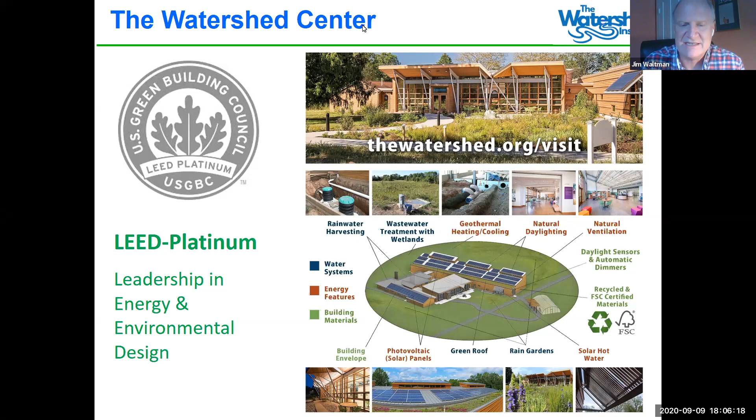It's also a great teaching platform for us as we work with municipalities and the private sector to improve stormwater management. We have a number of programs throughout the course of the year. I just want to queue up a couple that are a little bit in the future, but on February 4th and 5th, we'll be conducting our second annual Green Infrastructure Training and Certification program. This is designed for landscape professionals and public works staff, and it's a collaboration with a great group called the Chesapeake Bay Landscape Professionals. This is a program that just recently reached out to us in interest of expanding beyond their scope, which obviously has been the Chesapeake Bay.

And then later that month in February, we'll be providing a green infrastructure maintenance training program specifically for public works staff, and we'd love to have your town staff join us for that. Of course, our staff would welcome other opportunities to come and present to your municipalities if you believe that would be of help.

We're located near Pennington, Hopewell Township and Mercer County, and we tend to focus in that part of the state. ANJEC is a great partner that does work across the state of New Jersey, and I'm sure they would welcome opportunities to come speak to your municipal bodies as well.

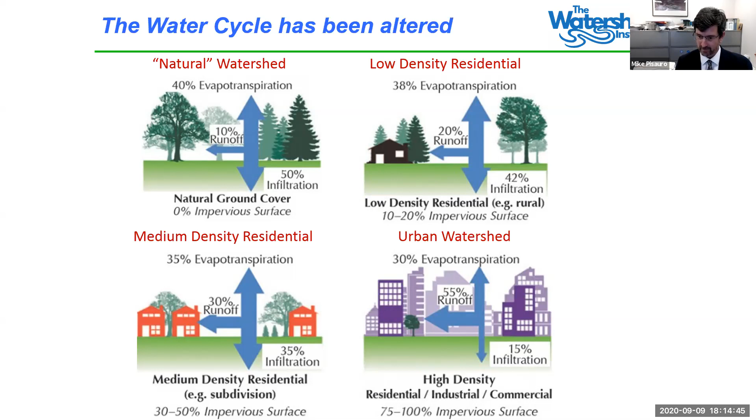Today, DEP just released with Rutgers a fairly regular land use change update, which indicated a little over 30% of New Jersey has urbanized, has urban cover, meaning that lower left-hand side scenario. So with 30% impervious surface, which varies depending on where you are in New Jersey, as a whole, 30% of water that hits the ground from rain events runs off versus 10% naturally. And that has real world implications.

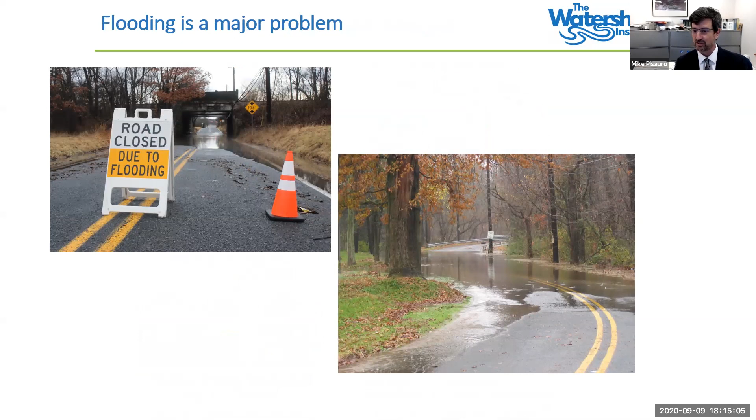And here are some of those real world implications. These are two roads that I take sometimes to work. As Jen mentioned, we've all experienced flooding and impacts on our way to work. Here's two of them that I've personally had issues with, and here's a few others. These aren't the Irenes, the Katrinas, and the Sandys—these are just everyday rain events, not extreme weather events.

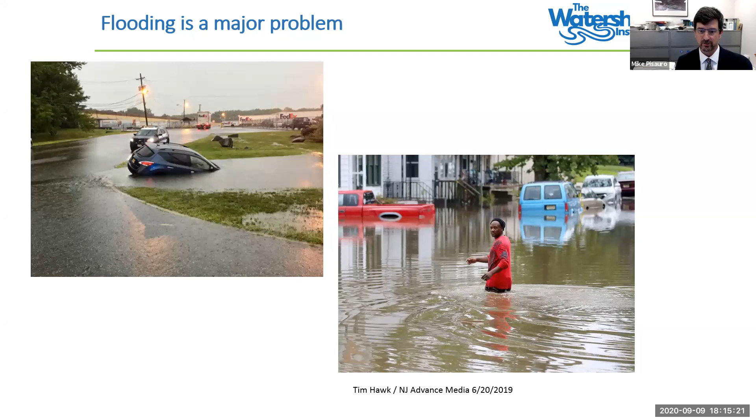What many of us grew up with from a rainfall event is changing, and that has changed over years. This slide's a couple years old, but in the first 70 years of the 20th century, New Jersey experienced a little over 44 inches of rain.

The first 14 or 15 years of the 21st century, that's raised to almost 48 inches, which gives you almost 3.5 inches more rain than we used to have and that we are used to dealing with. That means we're dealing with a lot more rain that has to be addressed, as the state continues to urbanize and has impervious cover. That water has to go somewhere.

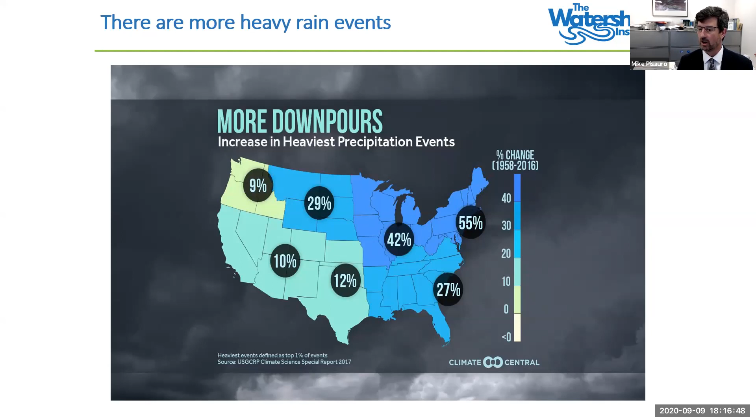At the same time as we're having more rain, the patterns of that rainfall have changed. In the Northeast, we're having more heavy precipitation events versus a long-term gentle rain that I remember fondly as a child, but more of it's coming down in a more intense period of time, which means our land cover and our systems have less opportunity to address it.

Not only are we having to deal with more rain, more volume, but that has real-world implications for water quality. Every two years, the state of New Jersey comes out with a water quality report, required by federal law. This is the most recent one, from 2016.

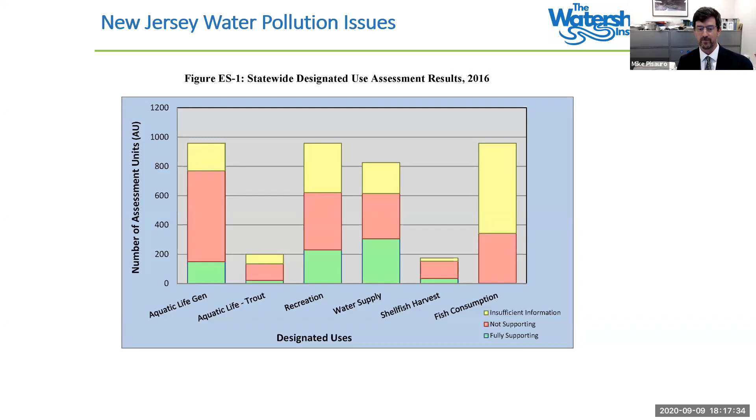Red is not good, and that red means we have water that's not meeting standards, that's not healthy enough for aquatic life, not healthy enough for recreation, not healthy enough for water supply. This is 2016, and in case people think I've cherry-picked a report...

2010, six years ago, a little different format, but generally the same result. If I went back to 2006 or 2004, we would generally have the same thing. Our modern stormwater rules came out in 2004, and we've been implementing them since.

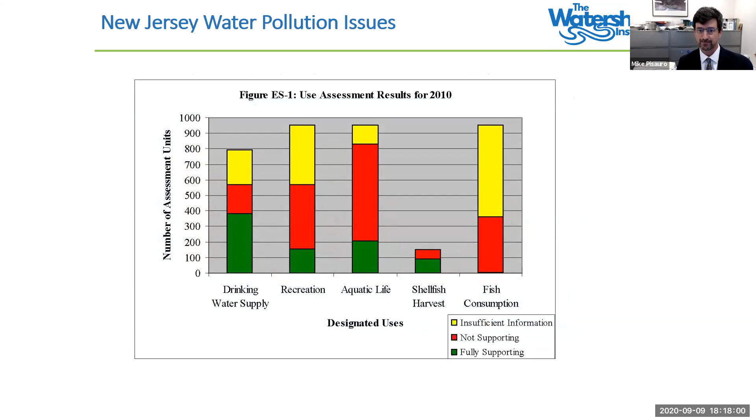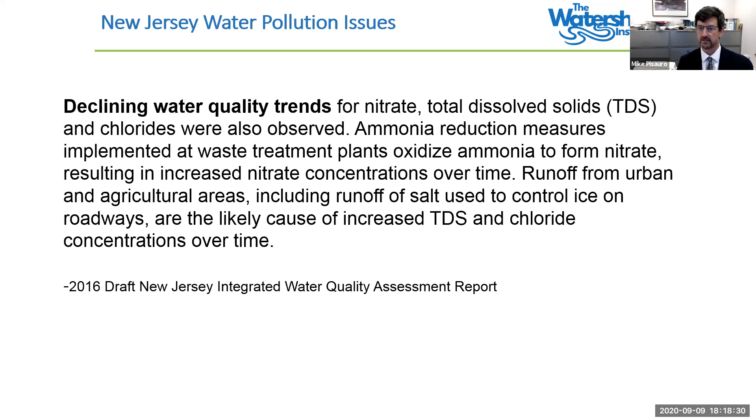DEP has indicated in the 2016 report and the 2014 report that we're seeing declining water quality trends, and that has been, for the most part, because of urban runoff, because of how we, as a developed state, are addressing our stormwater management. According to the 2016 report, declining water quality trends include total dissolved solids and chlorides, and again from that same report, there's a correlation between our land development and our water quality.

So all of that sediment has gone somewhere. All of that sediment has impacted aquatic life. All that sediment has impacted water quality. So there are some real implications.

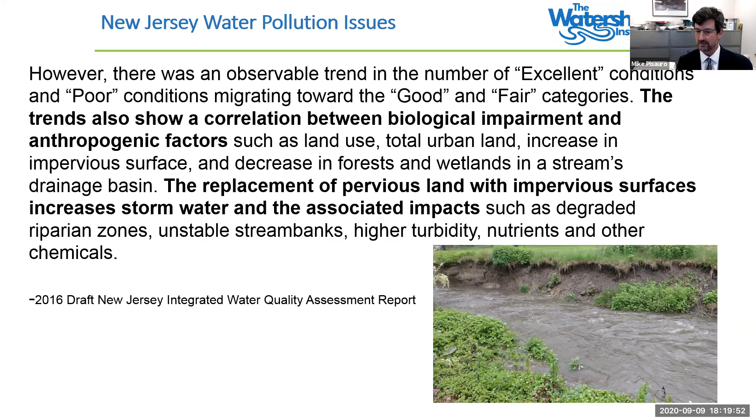As mentioned, our modern stormwater rules came out in 2004, and we updated them just this past March with the Green Infrastructure Rule. But we're trending towards a report card of a C. As I tell my kids, if that's the best you can do, that's great, but I know my kids can do better, and I think the state of New Jersey can do better, because the goal for water quality is not to become average, but to restore and enhance water quality so it returns to a natural condition. That's the goal we've had in New Jersey since the Water Pollution Control Act and the Federal Clean Water Act.

So that was a very quick run through of real-world water quality implications. As Jen mentioned, we're all experiencing flooding. We can all point to roads and areas of our town that flood, that maybe didn't flood as a kid or only flooded during an extreme event, but now it's becoming more and more prevalent.

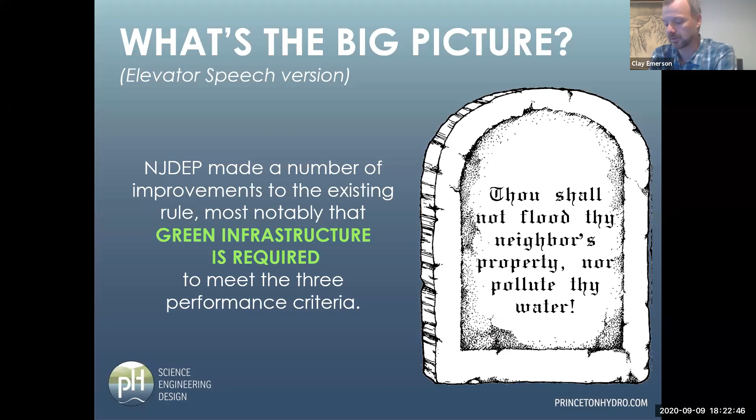And a lot of that hasn't changed. But the DEP has made a number of improvements to the existing rule, most notably that green infrastructure is required to meet the three primary performance metrics, if you will. I have to give them kudos for taking this on and going through a rather lengthy stakeholder process, getting input from the public - probably many of you participated in a lot of that. I think they really did an excellent job getting us to where we are now.

So very brief review of what I'm going to go over: some introduction stuff, and then dive into some of the details that maybe you aren't as familiar with.

So again, starting with a little bit of the bigger picture, what is green infrastructure? In our line of work, we look at it as more than just stormwater BMPs. We're thinking about wetland creation, reconnecting floodplains, living shorelines - it's a new approach to design with a focus on natural processes. Nature is an amazing thing, and things have evolved to work a certain way, and if we can take advantage of those processes to our benefit, that's what we're looking to do. That's more my general definition of green infrastructure.

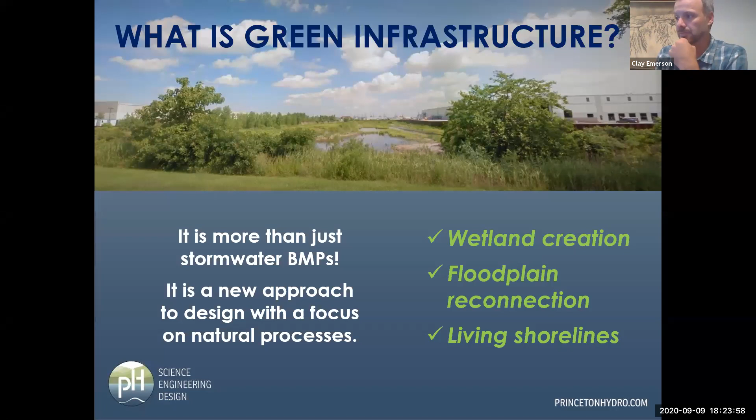But in our slice of that blue marble pictured from the moon, here in the state of New Jersey, one of the critical environmental problems we face is stormwater runoff, because we're at a point where we have a lot of infrastructure - Mike will talk about later - a built-up environment, and sensitive receiving waters that we all rely on for one thing or another.

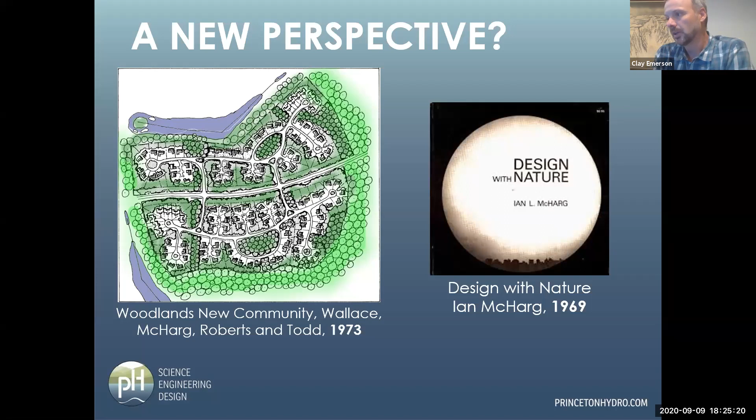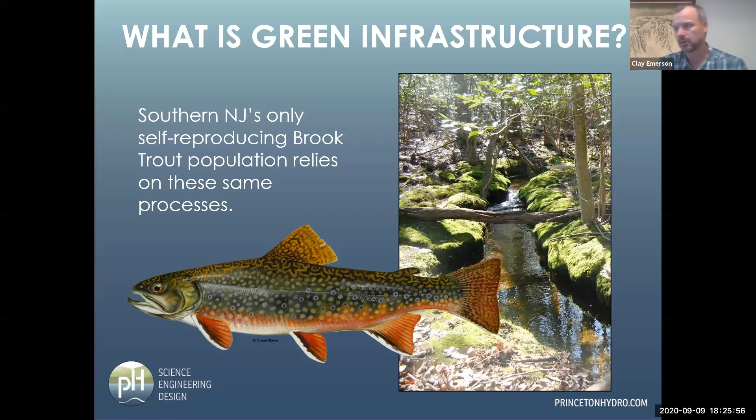Speaking of things relying on our hydrologic cycle, here's a picture of the state fish, I believe, brook trout. Believe it or not, there's a self-reproducing population of these fish in southern New Jersey where you wouldn't expect it - it is not stocked. It's a very weird watershed, and it has a lot of the processes we're going to talk about here today that, believe it or not, come back to this green infrastructure amended rule to thank for maintaining this really unique water quality in this very small tributary.

So we'll connect those dots. But for now, we're going to focus on that somewhat narrow definition of green infrastructure as it relates to managing runoff from impervious cover. This is a schematic clip from 50 years ago from some of that work I referenced. So what is old is new, but here it is, and the clock is ticking on these amended stormwater rules.

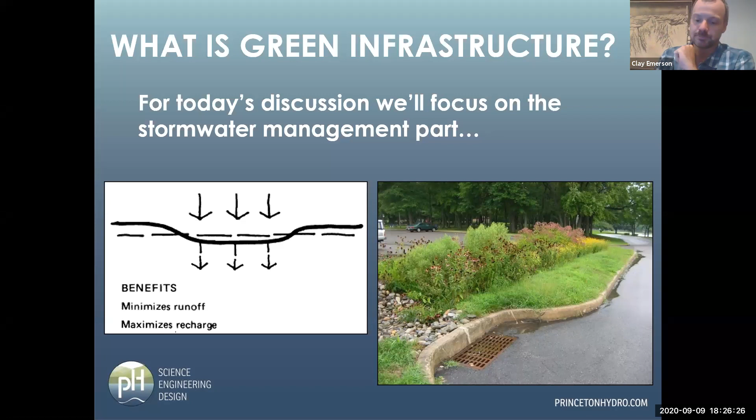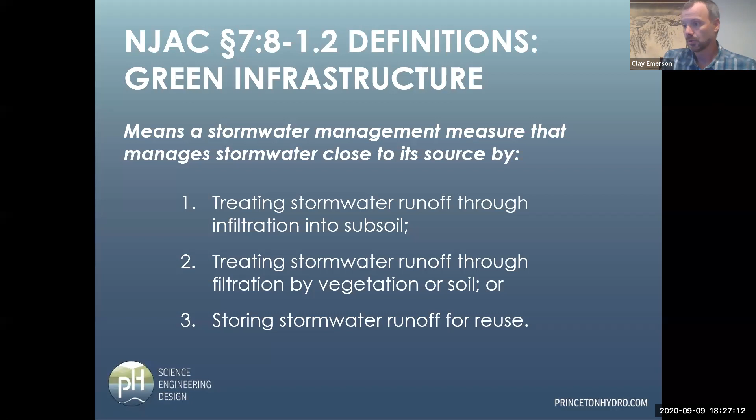So you can have whatever definitions you want, but what matters here is that the state has their own definition, referenced directly from the amendment, the new rules. The definition of green infrastructure means a stormwater management measure that manages stormwater close to its source - we'll come back to that part of the definition - by one or more of the following three things: treating stormwater runoff through infiltration into subsoil, or treating it through filtration by vegetation or soil, or storing stormwater runoff for later reuse.

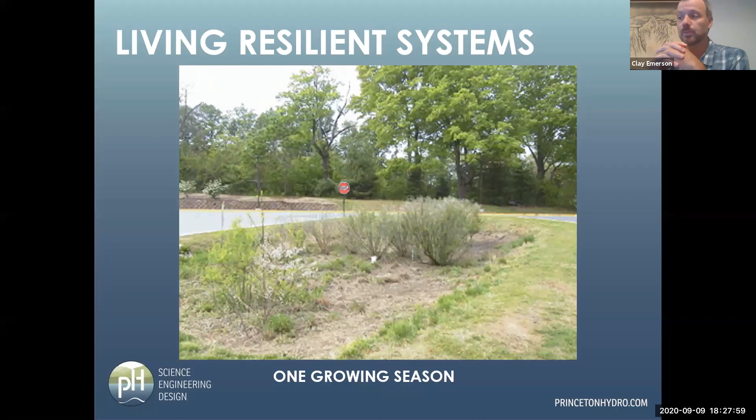And what we have here is just one growing season. I put this in here because these systems, many of them can really be living, resilient systems. So if you see this kind of productivity going on above the ground surface in this shallow traffic island that was constructed, you can imagine all the things going on in the soil beneath this that help keep this system working, and working without a lot, or in this case any maintenance besides mowing once in the late winter.

So we can talk about definitions, but I like pictures. Here's a couple pictures - what is green infrastructure? Both of these pictures are relatively recent projects. The top is a basin retrofit we completed in a residential neighborhood where the adjacent property owners wanted kind of a multifunctional system. They wanted the flora and fauna. They had a typical nasty detention basin, and this was the finished product they got. The photo at the bottom would also meet that definition of green infrastructure, but what you're looking at is a subsurface storage system that could be an infiltration system as well to meet that definition, and that's going to have a parking lot on top of it. So we've got to think of the wide range of things that would fit this definition. We'll get more into that.

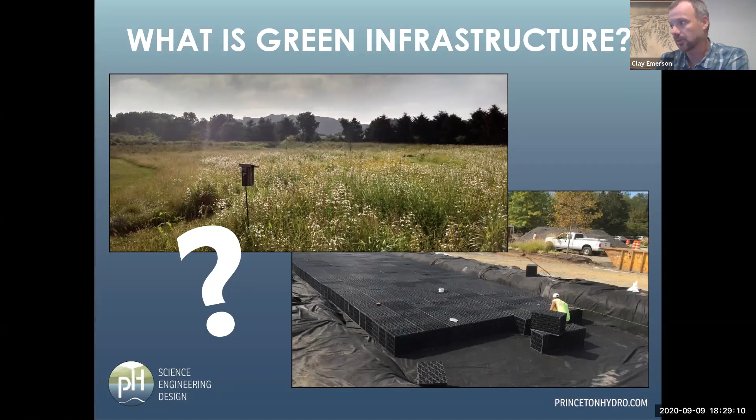Sometimes the best way to define things is to define what they're not. And this is probably an all too familiar site - typical detention basin, concrete low flow channel, they've got the left turn only retaining wall thing there at the outfall, and you can see here you've got the mandatory 1 inch of ponded water to provide habitat for the mosquitoes. There's nothing here that really screams water quality. So these things might be forced into extinction, at least as it applies to future development going forward.

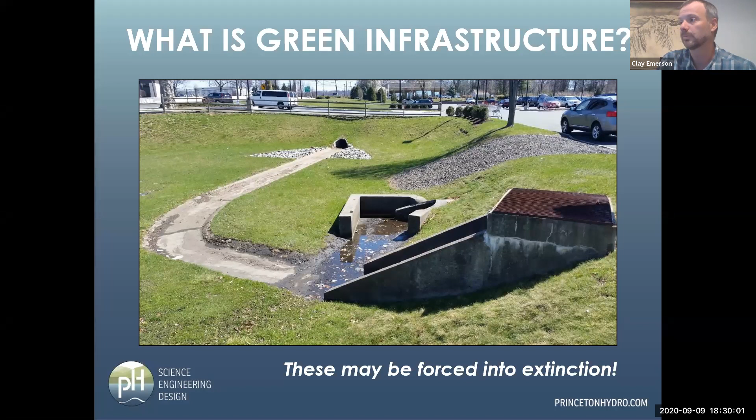So again, the three primary performance metrics are generally unchanged. As a quick refresher, we're talking about groundwater recharge, water quality, and peak flow control, or water quantity as it's referred to in New Jersey.

Those performance metrics, as I said, are unchanged. There's discussion about those - maybe that's something that will change in the future, but for now there are no changes there. That may seem surprising. But the big change here is that how these are met in practice, in other words what needs to be done to demonstrate compliance, is different in, I would say, many cases, not necessarily all.

So this is the Cliffs Notes version here that you'll be getting. There's more information - I'll give you some links where you can find more. Many of you, it sounds like if you've sought this out, you're on the ball and you're looking at things, and maybe some of this will be a review.

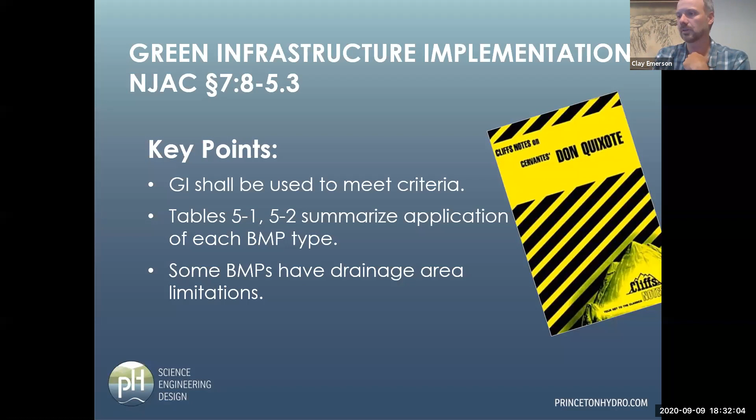But the key point here is that green infrastructure, I've abbreviated GI here, shall be used to meet the criteria. They published tables, specifically tables 5-1 and 5-2 primarily, which summarize how each BMP type can be applied. Some of these BMPs will now have drainage area limitations, which is a brand new thing. Another point is that the amended rules - the arrangement and ordering of the chapters has been totally shuffled, and that's a good thing. The new order the state placed them in is, I think, much clearer, easier, and more logical. So that's another improvement they made. But if you're used to your sections, they're going to mix them up on you, so keep an eye out for that as you go through.

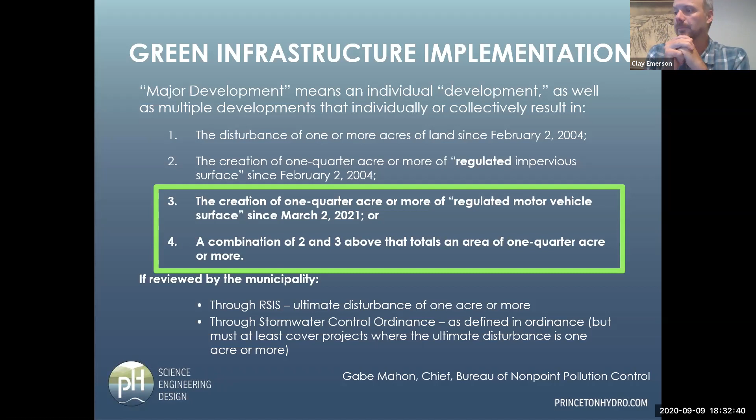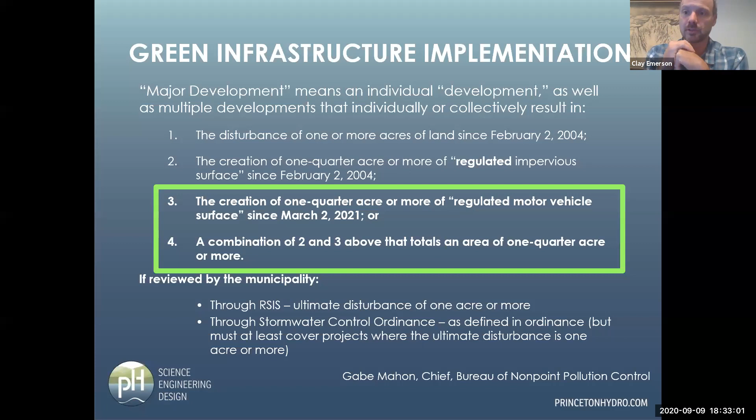In addition to the BMPs themselves, there are some other changes that require discussion here, and that is the definition of major development itself. Some of this is fairly new - they've added dates, changed the dates since February 2nd, 2004. But items 3 and 4 here are new: the creation of 1/4 acre or more of regulated motor vehicle surface, and then they have to put in a combination of 2 and 3 above. In other words, the take home here is that the term major development - that regulated motor vehicle surface, which we haven't defined yet - is kind of treated the same as impervious cover in terms of the definition of a major development. So that is something to keep an eye on.

So these slides are a little busy, but I would be in trouble if I didn't include them. I took this more or less with just some minor formatting from the amended rules, and basically this is table 5-1. You'll probably get more familiar with this - these are the BMPs that can be used for recharge, water quantity, and water quality. You can go across this and pick your favorite one, the ones you'll see the most of - small scale infiltration basins, you get 80% TSS removal. They can be used for water quantity as well. Let's see if I can use this thing.

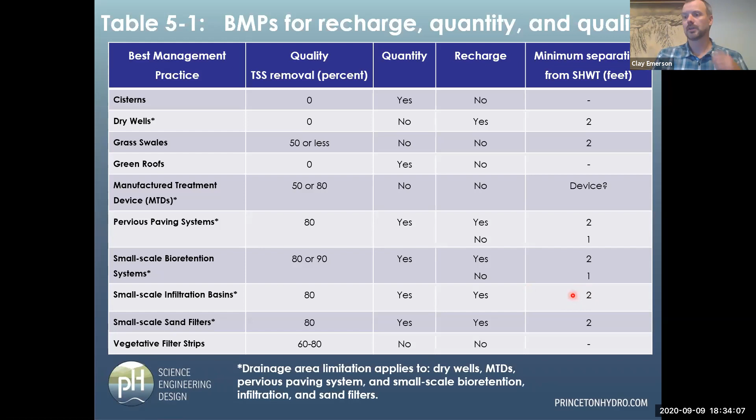And they can obviously be used for recharge, and they have to have a 2-foot minimum separation from seasonal high water table, a topic that I could go on and on about, but I'll try not to. And so a wide variety of different BMPs.

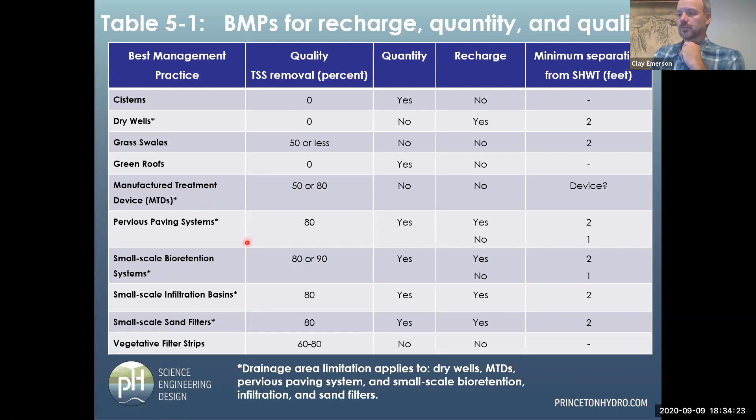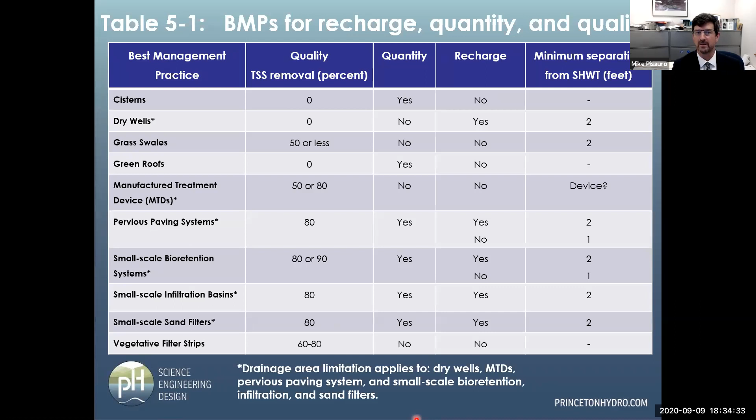These are all, depending in some cases on the type of MTD, considered green infrastructure practices that would be available. Clay, if you could just very quickly explain what a BMP is. Oh, absolutely, I apologize, I can't stand it when people speak in acronyms that I don't know. So yeah, a BMP, when I say BMP, I'm thinking of any stormwater management practice, something an engineer is likely required to design, in this case, to support a land development application.

So things like dry wells, detention basins, although you don't see that on the list here, bioretention systems, these are all BMPs. Another acronym I have listed here, manufactured treatment devices, you'll hear me say MTDs, which are proprietary boxes that are typically placed underground that provide some kind of water quality treatment for stormwater runoff.

And I'll be mindful of my acronyms going forward. Here I've got two other ones. This is one, seasonal high water table, SHWT. Again, that's something that in New Jersey is really a pretty big issue.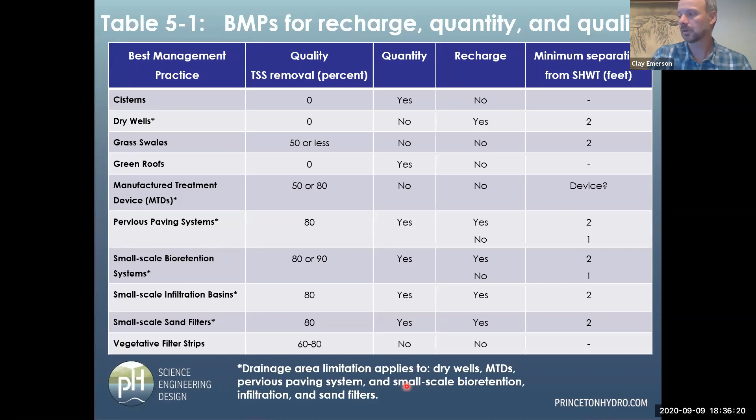If I may, I'm going to go back one slide. Some of these have asterisks, and I'll come back to that, but generally this is where those drainage area limitations come into play. So for systems like dry wells, again the manufactured treatment devices, pervious pavement, and small scale bioretention and infiltration basins and sand filters. I'll come back to that point.

These are the ones, this is table 5-3, which I didn't reference earlier intentionally. And that is because these are the ones that you would technically need a waiver for. So these would not be considered to meet the definition of green infrastructure generally. And again, manufactured treatment devices kind of show up in both places because there are some that meet that definition of green infrastructure and some that do not. So if you're wondering why you've seen that a couple times, that's why.

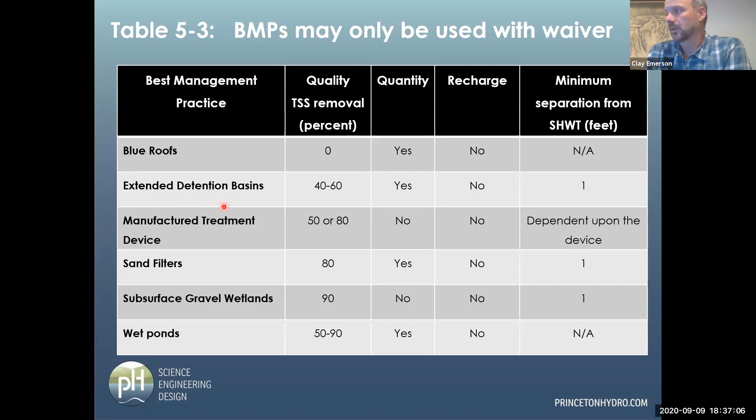And this is where our friend, the extended detention basin, lies. So again, this is new. Drainage area limitations. Recall in the definition that it had a statement that these are systems that manage stormwater close to its source. So the only way they could encourage or regulate that is to set these drainage area limitations. I'll have some examples that illustrate that later.

Dry wells, maximum of 1 acre, that's actually existing, that's in the BMP manual, or was even before this. Pervious pavement, a 3-to-1 ratio, I'll explain that. And then these other systems, the drainage area limitation that they finally arrived on was 2.5 acres. 1 acre was discussed for some time during the stakeholder process, but it's 2.5 in the amended rules.

Very quickly on the pervious pavement, you'll see some places where it's applied in this close-up video. Standard asphalt in the high traffic and truck loading areas, in this case porous concrete in the parking stalls, and they're just saying you shouldn't have more than 3 square feet per square foot of pervious pavement. I like the loading ratio approach, it's what's done on the other side of the river in Pennsylvania, but we have the drainage area limitations here to work with.

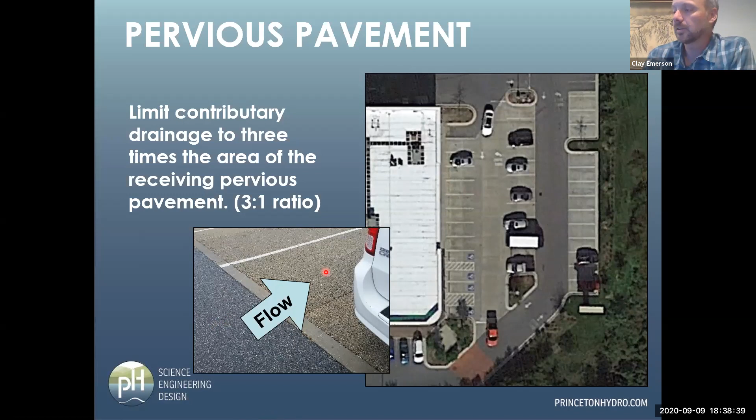So again, 2.5 acres. Obviously, if your site is smaller than 2.5 acres, this isn't something that is going to change the layout of your stormwater management, or it's not going to influence your application that you might be receiving at your municipality.

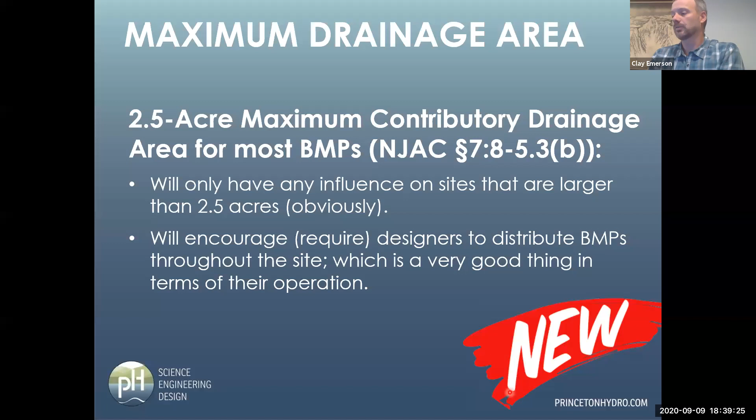And I say it will encourage, but really require designers — DEP doesn't encourage anyone to do anything, right? They write requirements. So this will force designers and engineers to distribute these BMPs throughout the site, which is a good thing, and that's one of the reasons they did this. In terms of their operation, they're going to function a lot better.

One clarification the amended rules made is that these 3 primary performance criteria must be met in each drainage area. So if you have a large site, or one in headwater areas where parts of the site drain differently, they've made clear that before people would do averaging, letting one side of the site go. Now they need to be met at each discharge point.

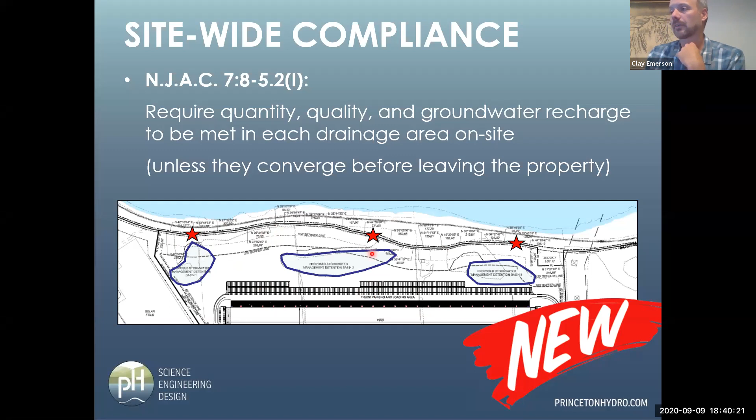Perhaps this isn't the best example, but if you have a site like this, these aren't really different tributaries it's discharging to, but it needs to be met at each location. This is a huge warehouse site that we're seeing a lot of in the state. So it would have to be demonstrated at each point.

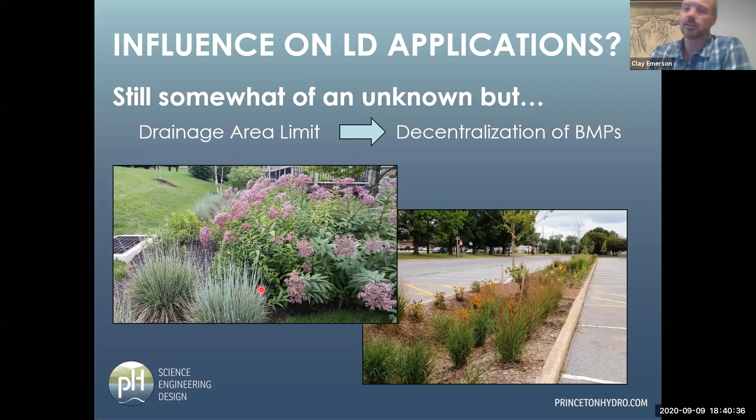So how will this influence land development applications? Well, we don't know exactly. We've done some looking at this, and obviously the idea is that it will lead to decentralized systems. An example of that, this is a large land development application where you can see there's stormwater systems spread around the site here, breaking it up.

This is a site where I think we would meet that 2.5 acre limitation by just, instead of having one basin, having multiple basins, multiple smaller systems spread around.

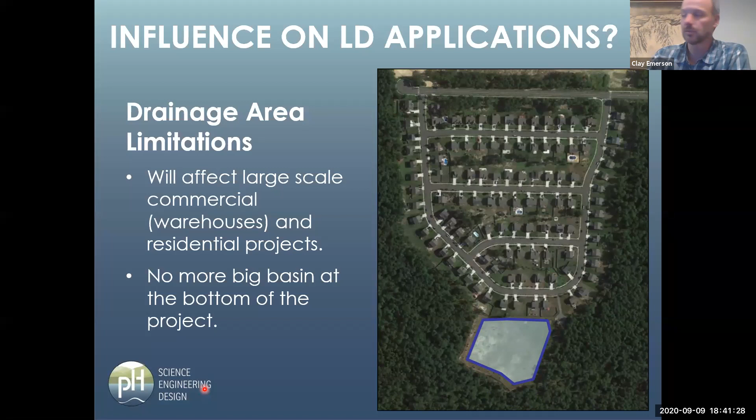Here's a relatively recent post-2004 application that will not look like this in the future. A fairly large infiltration/detention basin at the low point. This is the easy thing, this is what engineers are used to doing. But it's got a 30-acre drainage area, so that's not gonna fly anymore.

This is the typical approach, and I put here: no more big basin at the bottom of the hill, the bottom of the project. For large residential projects and the warehouse industry that's booming right now, this is something that's going to make changes in those applications, and changes for the better in terms of receiving water bodies.

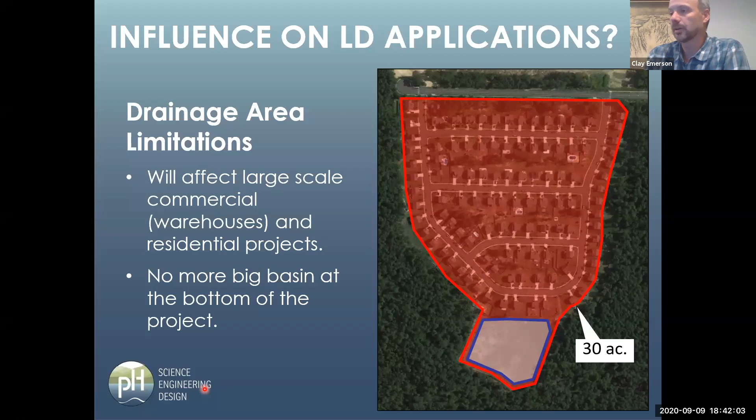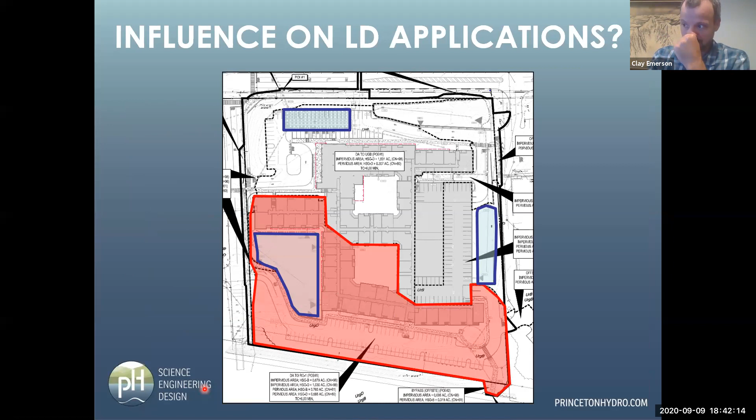Another example of what this might mean: this is a mixed use commercial residential application, and they've got a rain garden that's actually quite big, a third of an acre, but they have technically over 3 acres draining to it. So while that basin is, in my opinion, plenty big for that drainage area—that red area is the drainage area to the blue area here, labeled 0.33—that would exceed what these rules put into place.

So this would have to be broken up into 2 separate systems to make sure that your drainage area stays below that 2.5 acre threshold. It wouldn't change this one visually too much, but even this wouldn't quite comply.

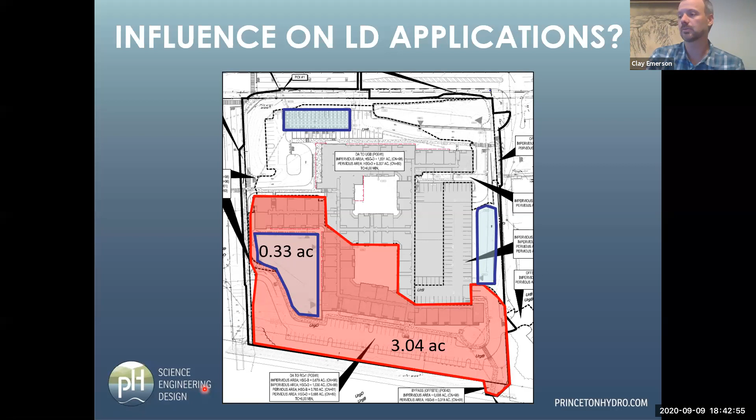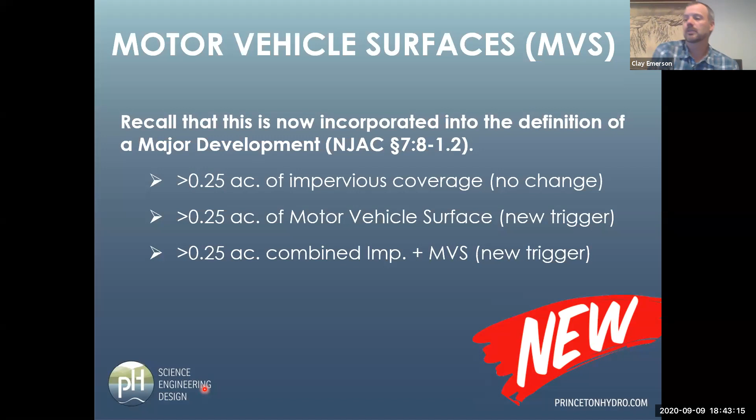The motor vehicle surfaces, I said we'd come back to that, and maybe this is an acronym we'll start to see now, MVS, I don't know. But this is a new part of the major development definition. So you can think of this as kind of a new trigger for that definition to kick in.

The other thing you need to know about it is there's a definition for it, of course, and it basically is what you'd expect: intended to be used by motor vehicles and/or aircraft, and directly exposed to precipitation. So this wouldn't apply to under levels of a parking deck or something, but not limited to driveways, parking areas, parking garages being the top parking deck, roads, racetracks, and runways.

These surfaces now require 80% TSS water quality treatment. So not everything fit into that before, and this is a change. And again, you have to look at what's not necessarily included in this as well, so what this rules in and what it rules out.

Standard pavement, drive, and parking areas, yes, and that was always the case—they always required 80% TSS for your water quality compliance. Gravel and dirt drive and parking areas, that was kind of a gray area before. It won't be so gray anymore—that's a definite yes, definitely meets the definition for a motor vehicle surface.

Rooftops, which are hopefully impervious or green like you have there at the Watershed Institute, no—and that wasn't really enforced anyway in my experience. Same thing with sidewalks or other ground level non-vehicular areas, like perhaps this plaza here in New Jersey. As I read the definitions, no, that would not require water quality control, and maybe that did before, but on a strict read and interpretation, I think I've bounced this slide off DEP before. So there are some things it brings in and some things it brings out.

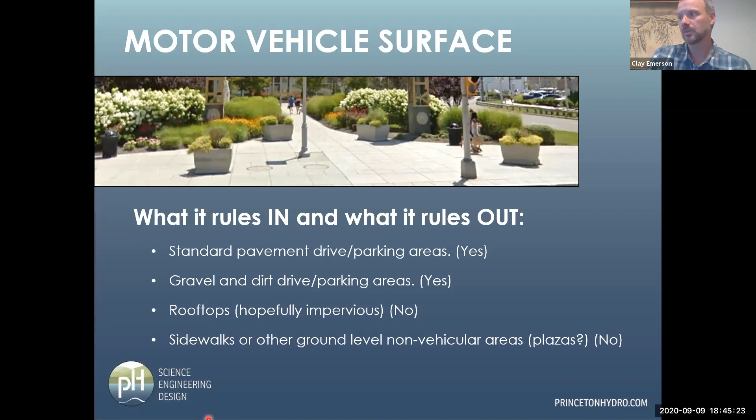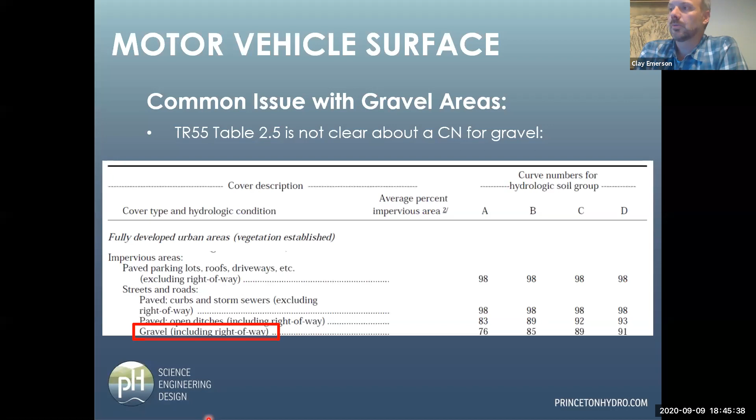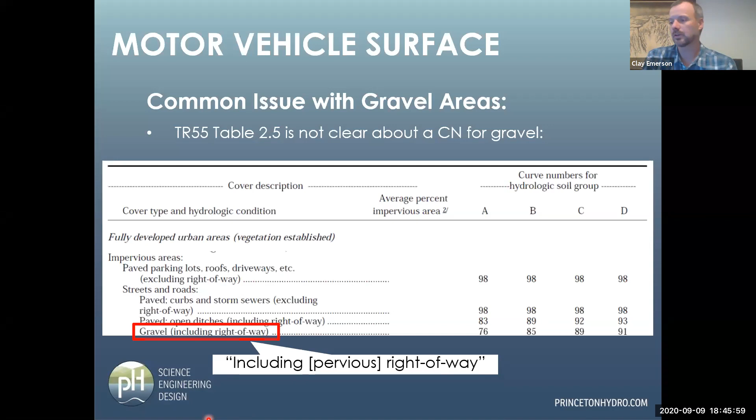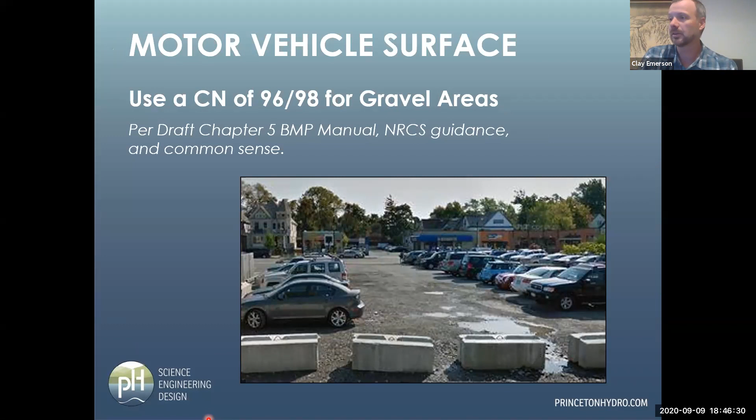One quick note for folks from environmental commissions and municipalities about motor vehicle surfaces - this is a side note of my own. When people include areas like gravel parking areas, they're often misrepresented in stormwater management reports. They shouldn't use the numbers directly from the TR55 tables, which is what engineers use to design these BMPs. They should really be using a curve number of 96 or 98, typically 98, to represent runoff characteristics from standard pavement. That's now in the draft Chapter 5 BMP manual, which I'll talk about later. It's also coming straight from NRCS discussions we've had personally, and it's also kind of common sense. But anyway, the first two seem to carry more weight.

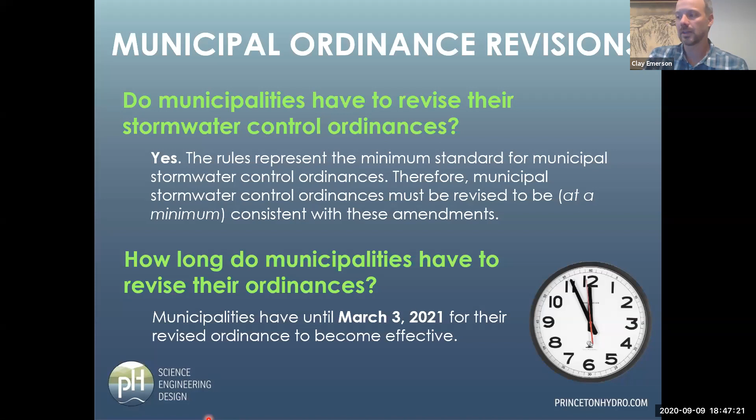Municipal ordinance revisions - that's what a lot of you are perhaps working on now or starting to seriously consider. Do you have to revise your stormwater control ordinance? Short answer is yes. The rules represent the minimum standard, and they must be revised to at a minimum be consistent with these amendments. The clock is ticking. This says we're in the 5 minutes of the 11th hour, but it's not that late. But as Jennifer said, time is flying, and that's not so far away - that being March 3rd, 2021.

But don't worry, there's lots of good guidance out there. You can talk to Mike Pisauro and the folks at the Watershed Institute - they have some resources they're working on. The state has, as of March, put up Appendix D, a new model stormwater control ordinance that gives you a huge head start - the ability to do things like lower the threshold requiring stormwater management. We've had some interest from municipalities about that. Perhaps increase the TSS requirement, and there are other municipalities in the state that do that as well.

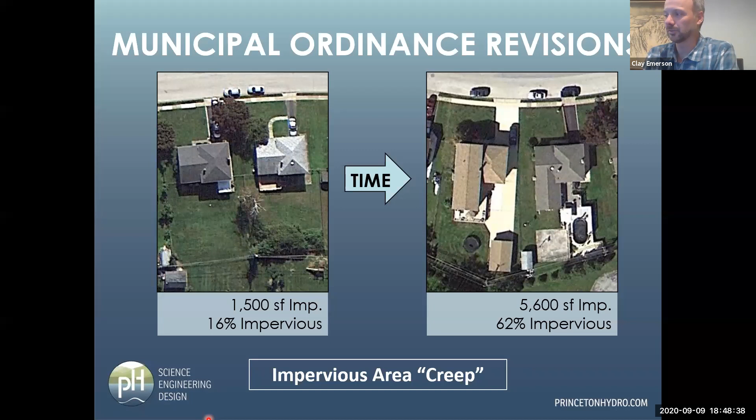This is something about that threshold. You can see the building footprints in this neighborhood all looked like the ones on the left when they were built. If you go through this neighborhood in Google Earth and do a tour, you'll find many that were drastically improved - so you went from something that was 16% impervious to 62%. None of this is really being captured in probably most all current ordinances, with the exception of what David is going to talk about.

There are some BMP manual revisions, and I'm going to wrap this up here with the last couple slides. They're still technically out for public comment - they were looking for these earlier, chapter 5 and 12. There's the link there - just search New Jersey BMP manual and you'll get links to all these new sections on the state site. There's also chapter 13, groundwater table hydraulic impact assessment for infiltration BMPs, which has been accepted. This is going to become a bigger deal with the revised rules.

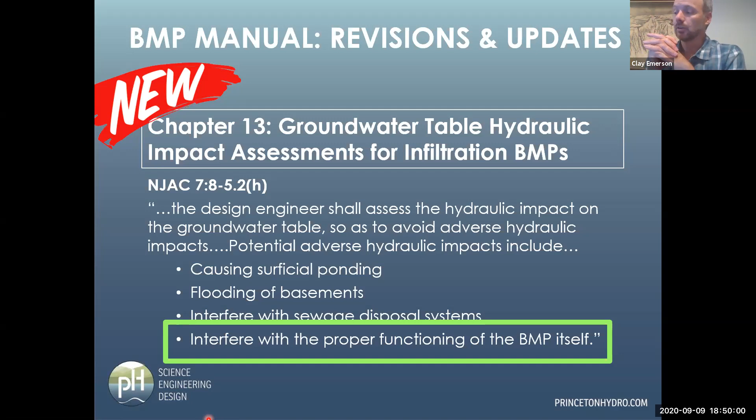What I'm talking about here is a lot of those green infrastructure systems that are going to be accepted rely on infiltration to function. There's a whole guidance document that the state has prepared through a stakeholder process to make sure those are being designed in a way that won't lead to either premature failure or them not operating like they're supposed to from day one. That's what I was talking about - the importance of seasonal high water table, something I could talk to you more about if time permitted.

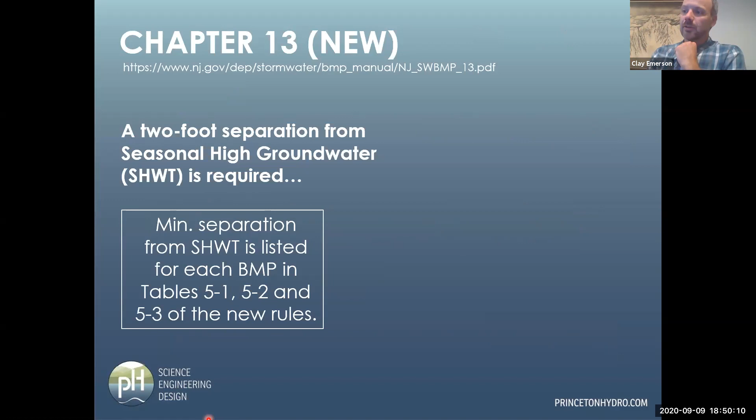But the gist of it is we've all heard this 2-foot separation from seasonal high groundwater is required. And the big stop sign here is that that doesn't necessarily mean it will work. So in tables 5-1, 2, and 3 of the new rules, they list the separation, but again that is not the green light that means the system will function. I think that's something that hasn't always been understood.

So that was a little bit of a whirlwind tour there. I know we're doing Q&A at the end, and Mike has been gathering those up. But with that, my email address is here, and I thank you for your time and your attention. Hopefully there was some new information there for you. And with that, I will turn it back over to Mike, who will take it from there.

You need to unmute, Mike. David, I think that's the first time anyone actually wanted to hear what I said.

Clay, thank you very much for that presentation. I keep learning stuff every time we go through this. One of the things I want to point out from a couple of questions - yes, there is starting to be a huge push of development and redevelopment throughout this state.

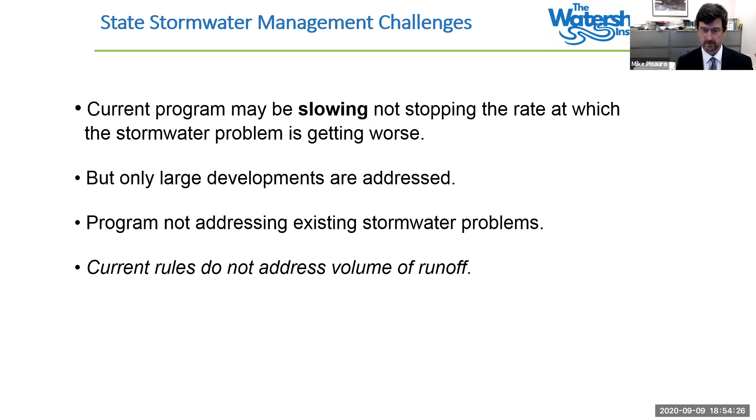There we go. And one of the big things I want to get out, because this is an issue - can municipalities be stronger? Can they adopt a stormwater ordinance that is stronger? I think the answer is clearly yes. I'm going to caveat that a bit. As Clay mentioned, there is a model ordinance that DEP put out. It's on their website, it's Appendix D, and I've highlighted in blue - I apologize, unlike Clay, I'm very word focused, not pictures, so my slides will have a lot of words.

But I've highlighted the important parts. Water pollution laws allow municipalities to take additional actions. The MS4 permit, which is that authorization for municipalities to collect and discharge and treat stormwater, specifically allows for stronger stormwater ordinances. And the model ordinance - this is language directly from it - says municipalities may choose to do stronger and additional measures. I think it's good practice for the municipality, when they do that, to explain in their resolution, in their ordinance adopting these stronger protections, why they're going above and beyond.

One of the biggest hurdles is a thing called the Residential Site Improvement Standards, RSIS, which is used as a cudgel. It is deemed, at least for residential development, not to allow for stronger protections. I think that is false. That RSIS statute itself specifically allows for stronger protections where there is a gain to protection of public health and safety. I think that's quite clear, but there's a caveat - there is some uncertainty in that.

So one of the recommendations, and this is what Princeton is going to be doing, is adopting not only these enhancements as part of their stormwater ordinance, but also incorporating them into their zoning ordinance, because municipalities have the absolute ability to zone and put those standards into the zoning ordinance. That is a way to address the concerns that RSIS may impact, which only applies to residential development.

And stormwater doesn't care - pollution doesn't care where it's coming from. It's coming off a lawn where you've put pesticides on, or from a house, or a lawn from a corporate campus. Doesn't matter, it's still pollution, it's still runoff. That's an issue. But again, I think since our stormwater management rules are water pollution laws, it should be clear that you can go stronger. You should probably just take a few steps to explain why, and add those protections in your zoning code as well.

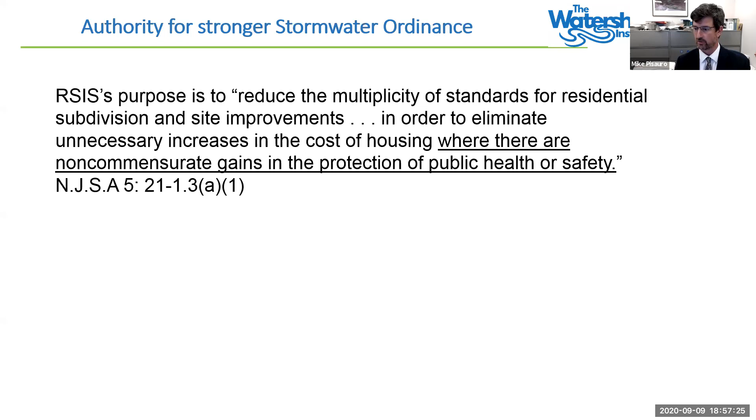So what are those enhancements that we've been talking about? They generally fall into a couple of categories: redefine what is a major development, since New Jersey stormwater rules only apply to those large developments. Address smaller developments, address redevelopment - so sort of what I've been calling the sins of the past, before we even knew they were sins, developments that may have gone in in the 40s, 50s, 60s, and even the 70s that had no stormwater management. If they get redeveloped, they by and large do not have meaningful stormwater management going forward, and we need to fix that.

Capture and treat stormwater on site. Enhance our analysis of what we are doing and how our systems are going to work. And then have a reporting requirement for municipalities so they understand what's going on in the town.

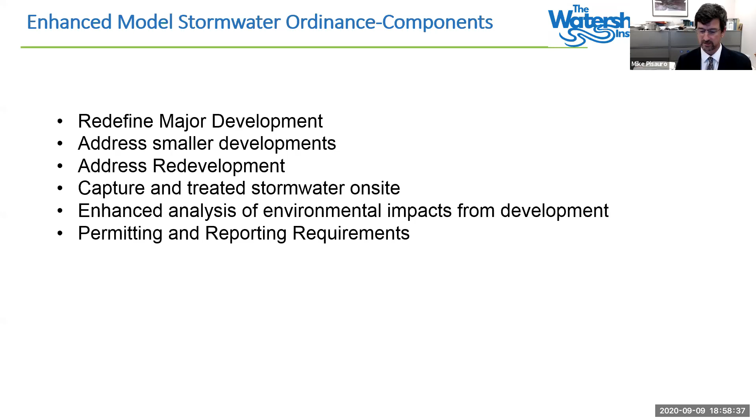I'm going to go into a lot more detail on all of these, but this is just a broad outline of the categories of enhancements. We do have a model enhanced ordinance on our website, and I will link to it at the end of this presentation, as well as DEP's model ordinance.

So I mentioned changing the triggers for major development. Right now, major development is defined as an acre of soil disturbance and a quarter acre of new impervious. We should be reducing those to a half acre of soil disturbance and 5,000 square feet of impervious cover. That would capture more developments so that you are getting the full level of stormwater management.

Include redevelopment. If you have a site that has a quarter acre of impervious surface, you raze that and put a new quarter acre of impervious surface. If you didn't have stormwater management beforehand, by and large you don't necessarily have that afterwards. So getting at that - some of our older urban areas, even older suburban areas that developed without stormwater management, here's an opportunity to start doing it. Start having your stormwater management addressed on site, closest to the pollution source. That's the philosophy behind the whole green infrastructure rule.

Decentralize and bring the treatment closer to the site. Retain on site the 95th percentile rain event - the rain event that will occur 95% of the time. Keep that on site so you're not having that discharge at all, reducing the volume coming off your site. That's going to have a huge protective effect.

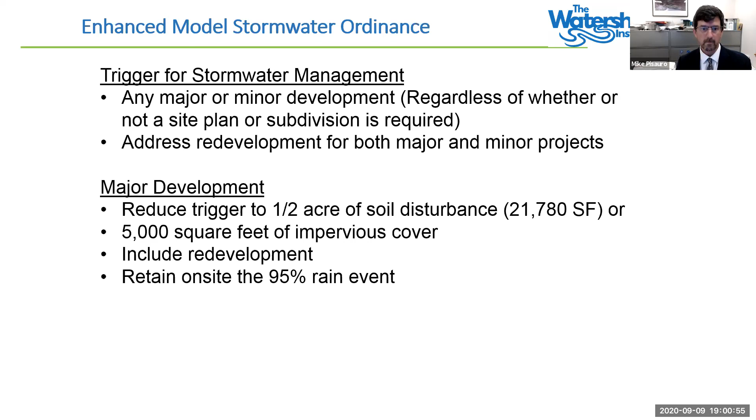Minor development - you'll have a lot of instances where even with the reduced major development threshold, that half acre soil disturbance or 5,000 square feet of impervious cover, you're not going to trigger that. But you're still contributing to stormwater runoff, still contributing a pollution load to your receiving body, to the municipality's stormwater system. So we're trying to address that.

What we did is craft a very simple mechanism to figure out what you have to do: for every 250 square feet of impervious surface, you have to start treating 2 gallons per square foot. So that 250 square foot addition, or your 3,000 square foot home which wouldn't trigger major development, will still have to help address the problem and reduce pollution loading to local water bodies. That 250 square foot addition would have to treat 500 gallons of stormwater - basically a 2-year storm, about 3.3 inches of rain.

Again, an on-site retention standard - try not to let it out so you're not flooding your neighbor, not contributing to volume downstream, because everybody is downstream. At some point, downstream will flood, and we're trying to minimize and eliminate that.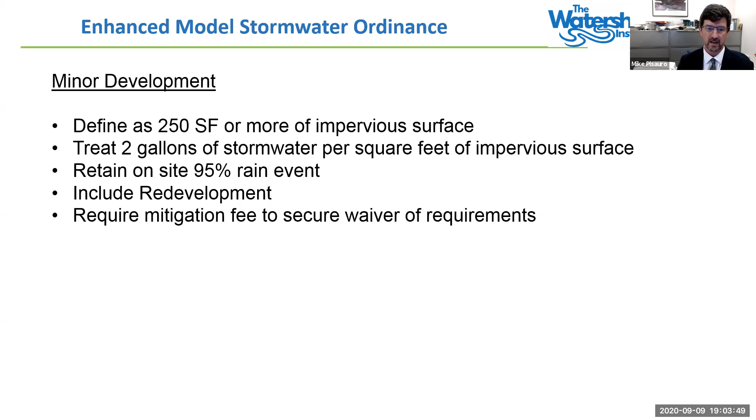Here's just a couple examples of minor developments throughout the state. There are probably about 2 or 3 dozen towns that have a minor development ordinance, ranging from 200 square feet of new impervious surface. Princeton has 400 square feet. I couldn't get them to go to 250 square feet, but that's okay, up to about 1,000 square feet of new impervious surface. These are the triggers throughout the state for minor development - not something we created, but something that's been going on throughout the state.

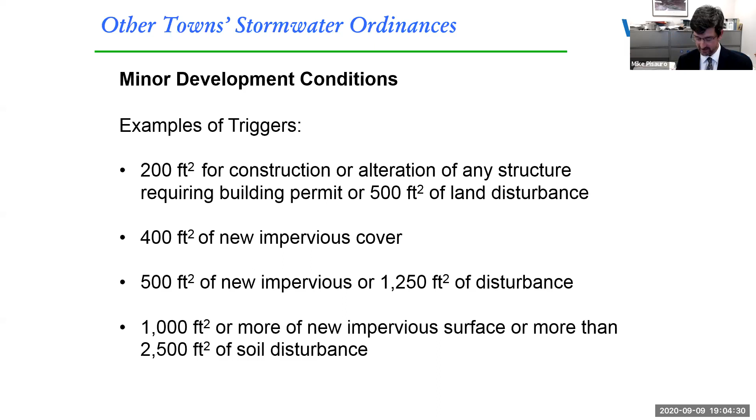Once you've triggered that, there are various levels of treatment. You have to infiltrate 3 inches of runoff per square foot. A lot of towns have that, and that 3 inches is just about that 2-year storm, or that 2 gallons per square foot that we're recommending. Cranford has a sliding scale. Princeton, again, has that 2 gallons per square foot of impervious cover to treat, and treat it with green infrastructure.

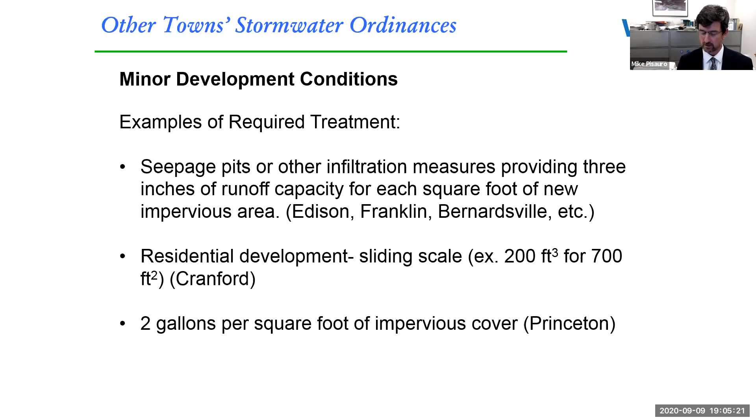As I mentioned, we try to create a system where you didn't have to, no offense Clay, hire an engineer to figure out what you have to do if you're putting on a sunroom or an addition to your home, or building a modest home that doesn't trigger major development. We wanted a way you could take a look, figure out what you had to do with your architect or landscape architect, and really incorporate it.

There's a lot of charts and material out there on how to do green infrastructure, how to do rain gardens. Here's an example from Rutgers' Water Resource Program to give you an idea: I have 500 square feet of impervious surface, I may need a 200 square foot rain garden, depending on your soils.

If you're doing an addition or new construction, you're going to have landscaping, so have that landscaping incorporate stormwater management. It's doing double duty - providing aesthetic value to your property as well as handling your stormwater. Very few people do an addition or new construction and don't do landscaping, so that's another aspect we thought would be very useful, and not an additional obligation on a landowner that they weren't going to undertake anyway.

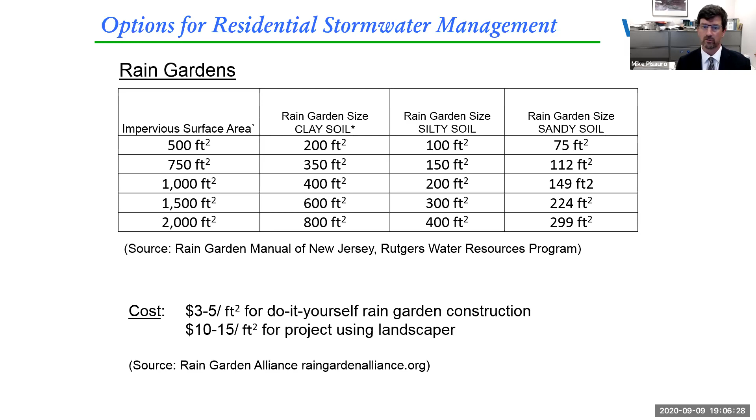I want to stress this waiver fee we're advocating is only possible for minor developments - there's a whole other set of requirements for major development. But there will be circumstances where there's no room for green infrastructure - you have contaminated soils, you may not want to do that. Or in order to do green infrastructure, you have to cut down trees, which may not be a benefit, because trees are a stormwater management benefit.

There was one property owner talking about doing green infrastructure - the logical place to do it on their property, because of the way things flow, was in the floodplain of a stream that floods very regularly. Not probably the best way to do it. So having a mechanism where the property owner can say it doesn't make sense to do green infrastructure on my site, or I can't do all of that requirement, and instead pay a fee to the municipality, which the municipality can then use to do improvements elsewhere to compensate, provides a level of flexibility to the property owner while still ensuring stormwater management happens.

The other thing we put in our model ordinance is enhancing the analysis developers have to do when they come for major development to a planning board or zoning board. What are the environmental features on site or adjacent? Are we talking about forests? Are we talking about core forests? Because as you start to lose core forests, you start to invite invasive species, which is a problem. Forests are a carbon sink, a climate change benefit, and a stormwater benefit, so you want to maintain your forests.

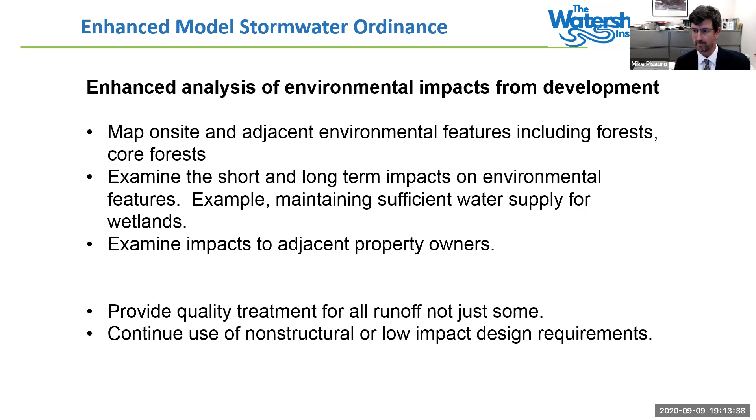As I mentioned, most of our waterways don't meet standards. I showed the two slides from DEP's water quality reports showing impacts. What DEP does -- this is federal law -- they come up with what's called a total maximum daily load, which is a pollution budget: how much pollution can go into a waterway and it will still meet standards.

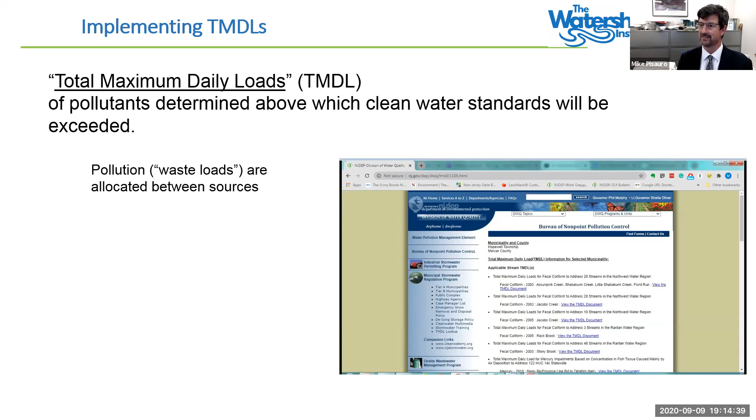That pollution budget will show you have to reduce your current allowance because we are now over budget. They allocate that budget to various sources -- wastewater treatment plants, urban stormwater management, agriculture, etc. What doesn't happen is taking that allocation and incorporating it into your stormwater management. So your stormwater management is exactly the same for a development going to an impaired waterway as one that isn't. If a waterway already has too much sediment in it, your stormwater management doesn't change.

Other states do that. They require better stormwater management and require municipalities to look at how to reduce the existing load. We think that should be incorporated into stormwater analysis, and municipalities do.

Up here is just a couple of screen captures of a TMDL for the Raritan Basin, including the Stony Brook watershed, Carnegie Lake, and Upper Millstone. I've highlighted two. Stormwater from residential cover has to be reduced by 84% into that watershed. That's an 84% reduction from existing loading.

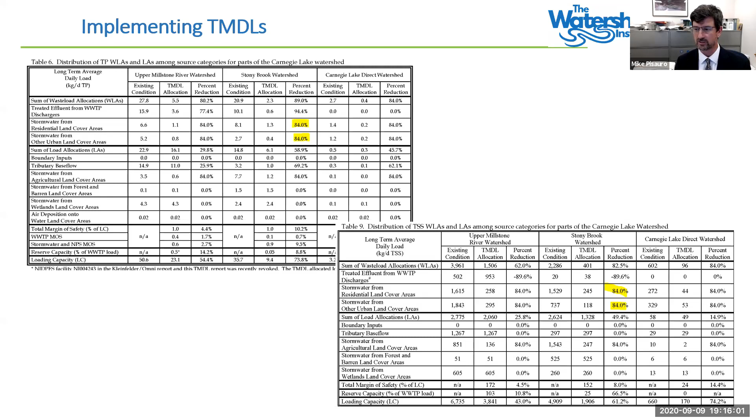So what stormwater management rules do is allow an increase of pollution into that waterway. It's an increase by 20%, but it's still an increase, not a reduction. Taking a look at and incorporating an enhanced stormwater management approach for these water bodies that have already been burdened, I think that would make sense. And I think that's actually required by the Clean Water Act and the law. So we're encouraging municipalities to incorporate that.

Then there's a reporting requirement. All stormwater management, and this has been in existence since 2004, has to be maintained. That's probably one of the bigger omissions for most property owners.

In 2018, DEP released a new permit for municipalities, which authorized them to collect and treat stormwater, and to review and approve stormwater management plans for development. At the end of each year, municipalities have to report back to DEP that all of their publicly and privately owned stormwater management systems are being maintained and are operational.

What we've recommended to municipalities is to have an annual stormwater permit, so all responsible parties who have a stormwater management system on their property get a permit. They have to submit reports to the municipality that these systems are being maintained, and the municipality has the opportunity to audit those reports to make sure that's in fact happening.

We've recommended a fee, mostly because it helps the municipality defray the cost of implementing the program and complying with their permit. I don't look at this as necessarily a new requirement for the municipality - I look at it as a mechanism to help them comply with what they already have to comply with, and hopefully help improve stormwater management so they can identify sites that aren't working and go back and fix that.

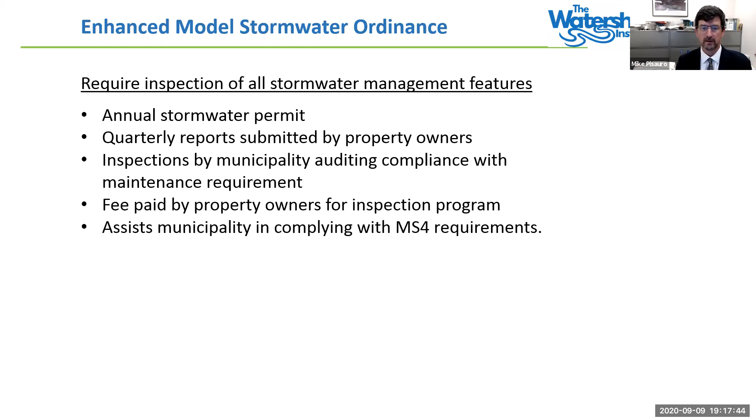And then I have a bunch of examples of green infrastructure, so we have a sense of what it is. But what I'm going to do is hand this off to David to talk about Princeton's experience with the enhancements that they did in 2017 and what they're going through at this point. So I'm going to stop sharing, David, and you are up.

Thank you, Mike. Let me pull up my slides.

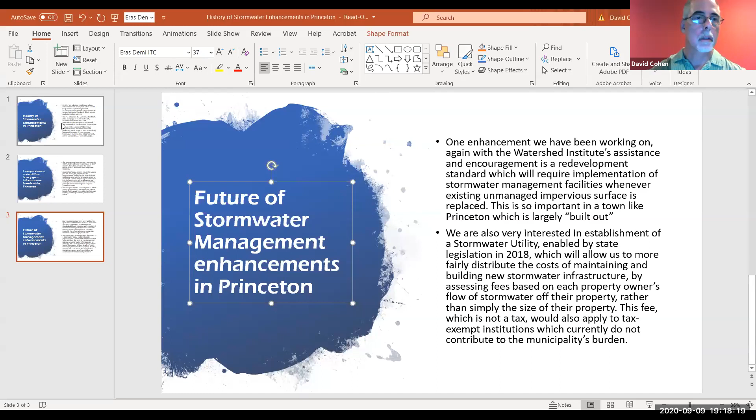Before I start going through the specifics of what we've done, I want to make a pitch for any municipal officials on the webinar: this isn't a selfless gesture to just help the state and our water bodies - it's also something with real local benefit. Mike mentioned that some local officials are concerned that residents will object strenuously to the enhancements the Watershed Institute is recommending. But we're finding that not only can we promote better stormwater regulations on environmental grounds, including through our climate action plan adopted in Princeton in the last year or so, but it's also a benefit from the standpoint of emergency preparedness and emergency management.

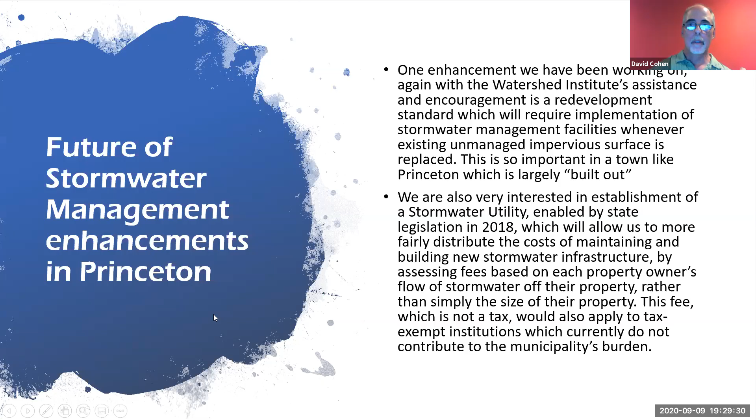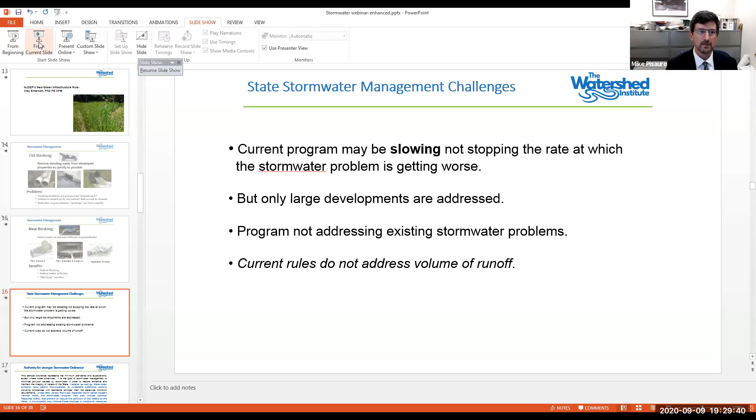Just a couple more. So we're going to talk about questions and answers in a few seconds. But as mentioned, municipalities have to have an effective ordinance by March of 2021. There's a lot of education abilities. We have some of that here. The Watershed Institute, I don't know Jen if you want to chime in, and Jack is more than happy to do some educational presentations to council ECs. To do this, one of the reasons we're doing this as a webinar is to get the word out a little larger. We've given this presentation or something similar to about 12 or 15 of our municipalities, but there's a lot.

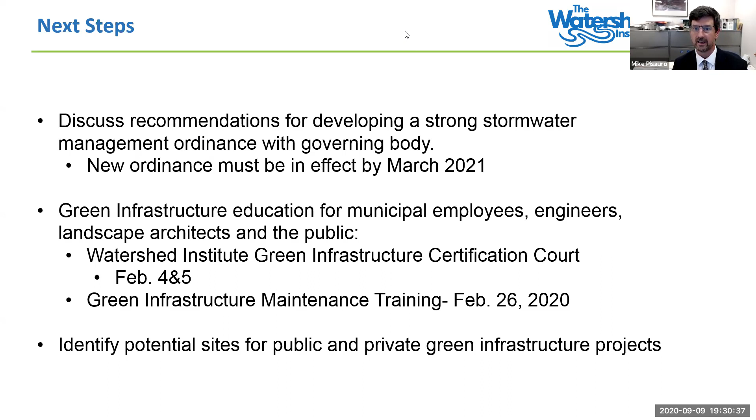So I am going to stop sharing for a second again and start to go through some question and answers, and hopefully people can answer it. So I'll take the first one.

Is the mitigation fee an annual fee? No, that would be a one-time for minor developments. As David clarified, there are mechanisms in the major development to waive requirements. There has to be a mitigation project. That mitigation project has to actually occur before or at the same time as your development is going forward, and the town has to have a mitigation plan or mitigation criteria. So the waiver fee I was mentioning, mitigation, is for the minor developments going forward.

Let's see, Mike, there were just some basic questions. If you could define, Clay, the 95th storm, and then why is TSS removal so important?

Sure, I'll handle that. I think what Mike meant by the 95th percentile storm is the storm, the depth of which varies across the state. I don't have the exact number on the tip of my tongue. Mike and I were just talking about this before. But the capture of that storm, and every storm smaller than that, plus that portion of all storms larger than that, would constitute 95% of the annual precipitation. So the reality is when it rains in New Jersey, it usually doesn't rain that much. A lot of the rainfall that happens occurs in relatively small precipitation events. A day like today, we just got a little bit of rain. Those smaller storms constitute the vast majority of the annual rainfall. So even designing relatively small green infrastructure approaches, if you're capturing that first half inch up to 1.25 inches, that's our water quality design storm, you're going to be capturing the vast majority of the annual rainfall by volume.